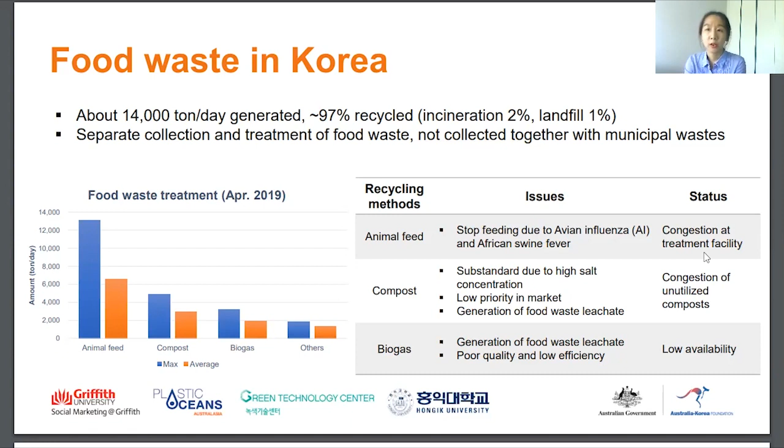In the case of biogas, this is actually a practical approach for food waste, but the final product from gasification showed poor quality and low efficiency at the moment. And currently, only a small portion of food waste is gasified.

We have several ongoing issues related to food waste. First, we need an alternative recycling method for food waste. Secondly, there is a policy requirement for renewable energy. Renewable portfolio standard, RPS, requires electric providers to provide a specified percentage of electricity with eligible renewable resources. To meet RPS requirements, wood pellets have been applied for co-firing with coal in a thermal power plant.

As you can see in this figure, the target renewable supply obligation is 9% for this year, but I was told we are doing about 6% at the moment. And using wood pellets is costly because over 90% of wood pellets have been imported.

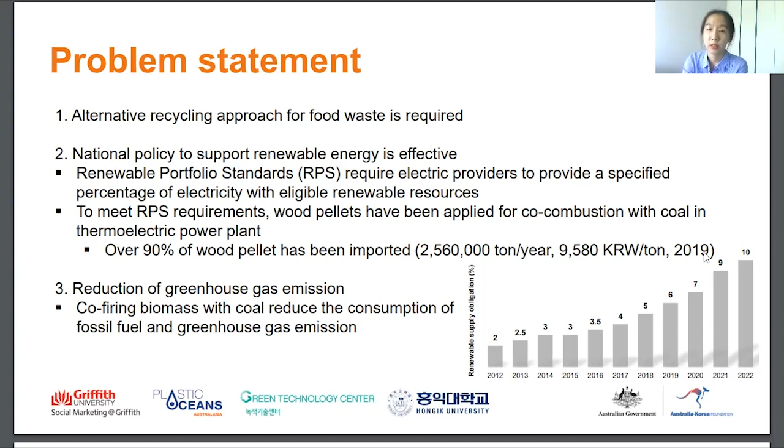The last issue we need to consider is the reduction of greenhouse gas emissions. Running a thermal power plant is one of the main sources of greenhouse gas emissions. Co-firing biomass with coal reduces the consumption of fossil fuel and greenhouse gas emissions. Therefore, we aim to propose an alternative treatment approach for food waste to ensure future sustainability.

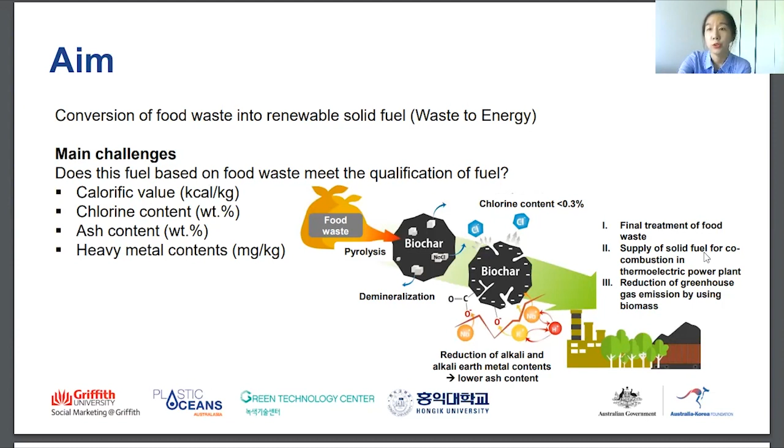In our research, food waste is converted into renewable solid fuel. Here, the main challenges are to satisfy the qualification of fuel, including calorific value, chlorine, ash, and heavy metal content. What differs here is that we produce high quality food waste biochar. I am going to go into details on this process on the next slide.

And this is a base workflow. Food wastes are collected in the food waste treatment facility, and these are dried and shredded. Dried food waste is put into the pyrolyzer. Pyrolysis temperature is set to 300, 400 or 500, and the retention time is 10 to 30 minutes.

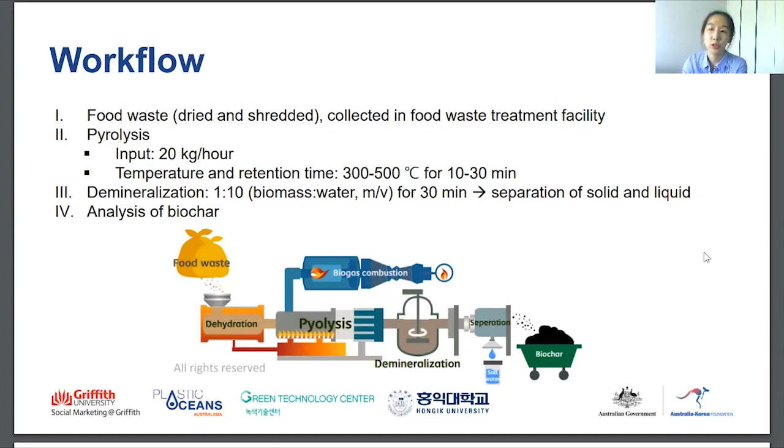After pyrolysis, food waste biochar is produced and desalinated to lower chlorine content. Food waste biochar is dried to remove the remaining moisture, and the final product biochar is analyzed to make sure of its quality. I'm going to show you what we have achieved.

First, the chlorine content in food waste was efficiently lowered by demineralization. And this is a critical issue in solid fuel because when biomass containing chlorine is combusted, it generates dioxin and dioxin-like substances, which are very hazardous.

The chlorine content of raw food waste is 1 to 2%, and after pyrolysis, concentration increased to 2 to 4% because volatile matters in raw food waste are volatilized and overall mass is reduced. So relative chlorine concentration increased. The high concentration is lowered to 0.5% after demineralization.

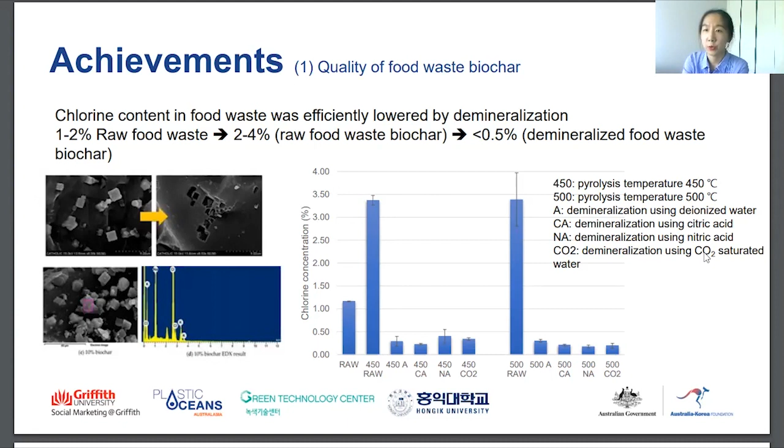And I'm going to skip the details of this figure and the experimental process, but the point here is that various pyrolysis and experimental processes have been tested to find out the most efficient reduction method for chlorine from food waste biochar.

And calorific value is another critical factor in fuel because this implies the amount of energy produced based on fuel. And low ash content is desirable because high ash content in biochar leads to slagging and fouling in the plant facility. Several experimental settings were tested to achieve high calorific value and low ash content of food waste biochar.

As you can see here, pyrolysis temperature of 500 degrees Celsius and demineralization using CA, where CA means citric acid, is the most efficient method to obtain food waste biochar with high performance. And this calorific value of 5,000 kilocalories per kilogram is similar to that of coal.

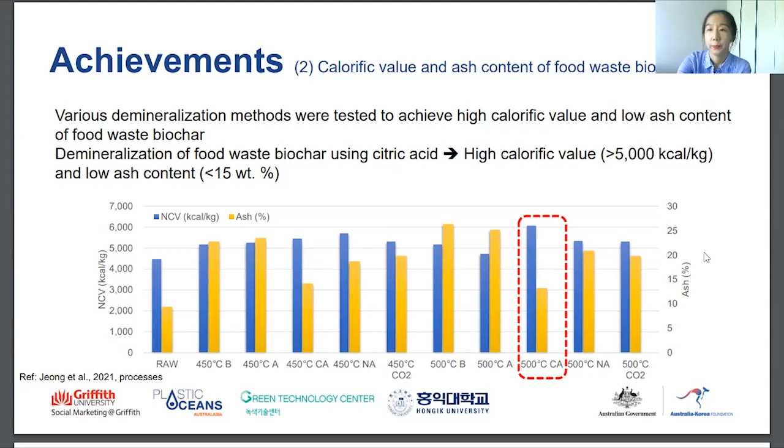We also consider other biomass, sludge from wastewater treatment plants. Sludges are usually employed in co-firing with coal, but high metal concentration and low calorific value have been problematic. So we thought a mixture of food waste and sludge may increase calorific value and lower heavy metal concentration. And we can see it here.

From the graph on the left side, with an increasing food waste ratio on the x-axis, the calorific value of mixed biochar increased. And in the graph on the right side, you can see here the heavy metal concentration decreased with increasing food waste ratio.

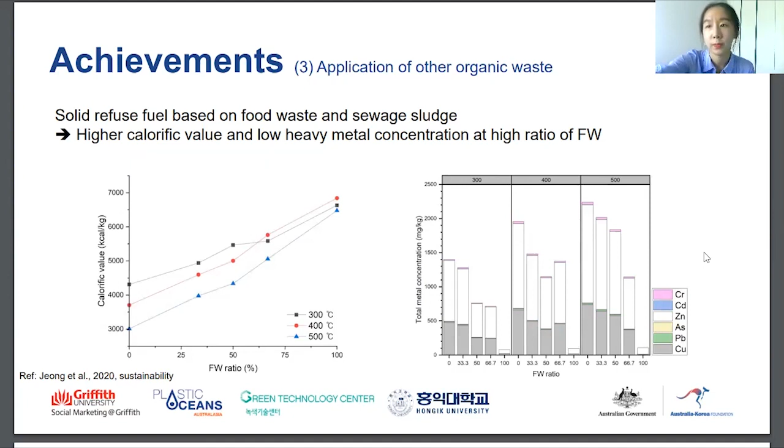So far, I have introduced the research we have worked on, but this is not going to work if we work alone. Converting waste into renewable energy requires the cooperation of regional government and electric providers. We have networks with electric providers and regional organizations.

So far, we have focused on laboratory and pilot scale research, but talking about actual application of food waste biochar in the plant facility.

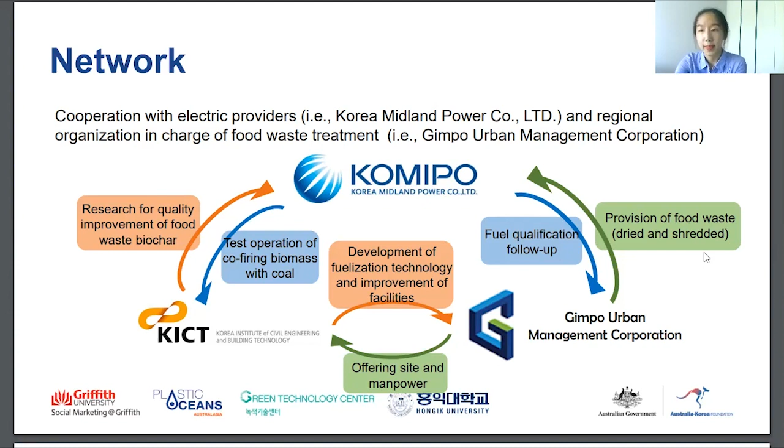This is my last slide. The very beginning idea of this research is that food waste is an untapped energy resource with a large volume and high carbon content. We confirmed that food waste biochar meets the qualification criteria of fuel for coal-fired thermoelectric power plants in many aspects. In addition, we also checked that the combination of food waste and sludge is promising.

But we still have a long way to go. The energy efficiency and combustibility of food waste biochar in the plant needs to be tested. And we don't know the optimized ratio of biomass for co-firing. And of course, the life cycle assessment of food waste biochar is required to ensure that this is sustainable and environmentally friendly. Lastly, we have regulatory issues.

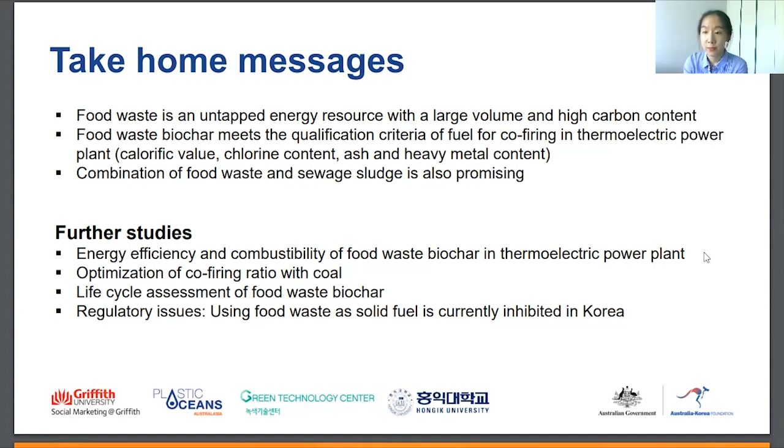Currently, using food waste as solid fuel is inhibited in Korea. So we are talking with people in the regulatory and industrial sectors to sort out the better approach for food waste. That's it for my presentation, and I will be happy to answer your questions.

Thanks, Yoonah. Thanks so much for that. And I actually understand that you like dining. A little bird told me that you like dining out and going out to restaurants with your colleagues, and that if there's any food left over, instead of leaving it there, you actually make sure you take the food for research later, of course, knowing that it's better to have no waste at all. But that's wonderful to know that you actually do practice what you preach.

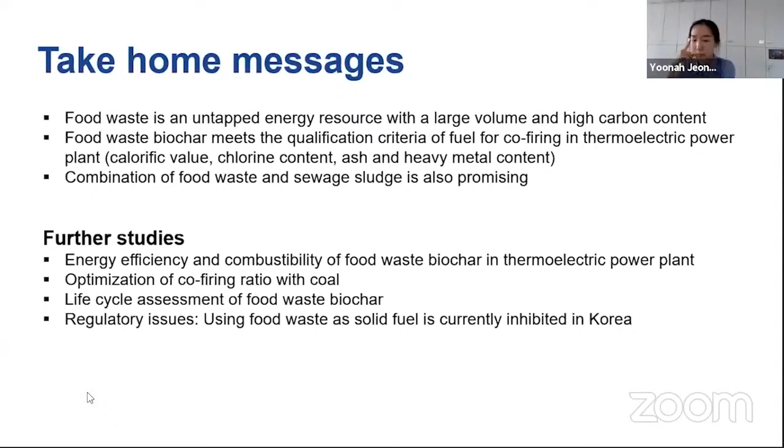Before we move on to the next speaker, I did actually have one question that I wanted to ask you, because I find this really fascinating with your studies and what you're working on. I wanted to ask you what you think the advantages are of using food waste biochar in a thermoelectric power plant compared to using wood pellets. I just wondered if you could expand a little bit on that. I'm quite interested in that comparison.

Actually, wood pellet is a good material for co-firing, and that's why we use it at the moment. But the problem is we need large quantities, and it costs a lot. And the application of wood pellets generates a high amount of ash, which causes operational issues in plant facilities. And we found that the quality of food waste biochar is similar to wood pellets in terms of calorific value and chlorine, ash, and heavy metal content in many aspects.

But food waste biochar is an economic choice because a huge amount of food waste is generated every day, and we can use existing plant facilities to produce food waste biochar. So it's a cheaper choice. And we think using food waste as a renewable fuel solves both environmental and social problems in the waste and energy sector.

But actually, everyone needs to keep in mind that this research is based on lab and pilot scale at the moment. This is not actual plant scale research, so we are working with electricity providers and regional government to deal with this issue from a broader perspective. Fantastic. Well, I hope it comes to fruition from the pilot stage, because it's obviously fantastic that over 90% of the household food waste is being used, which is terrific.

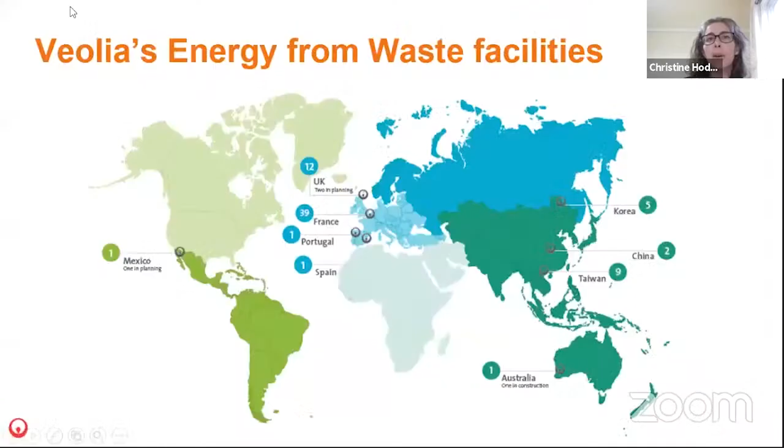So from a global perspective, I guess it's interesting to understand where we fit into the overall scheme of things. When we look at overall recovery rates, we talk about recycling and energy recovery as two of the key elements that contribute to creating recovery across the board. And where Australia sits in this global picture is we're relatively good at recycling, so we have a reasonable recycling rate, but due to our heavy reliance on landfills, we haven't been able to bridge that gap in terms of our overall recovery rates.

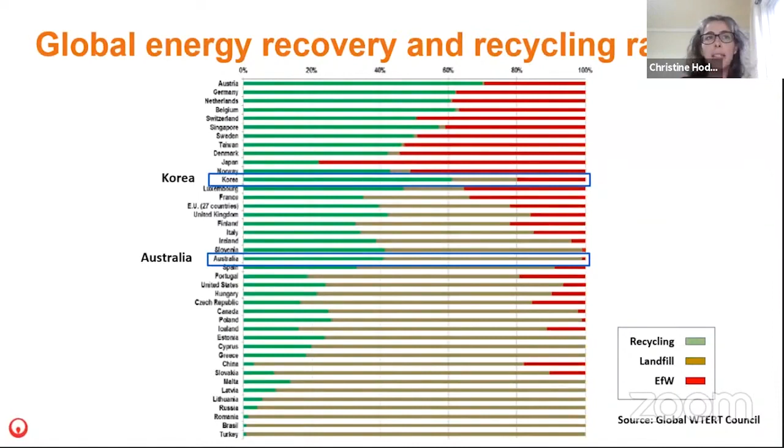So next slide, please. So if we then look at the Australian landscape from a policy point of view, it is very complex. We have 3 layers of government that all have different roles to play in terms of how we manage our waste and our resources. So at a national level, we do have policies, we've got action plans, we have export bans that are gradually being implemented over the next few years, and we've also got net zero ambitions. So that's a really good platform for us to start from.

I guess the challenge is that the waste that we manage is regulated at a state level, and so the state governments have a very big role to play in terms of determining what type of levers there are to encourage different technologies to be implemented.

So it's pleasing that all states and territories do have waste strategies and action plans to try and help drive the direction that we're heading. And in terms of all mainland states, there's a specific policy on energy from waste, which does assist. I guess the challenges that we have is when there are discrepancies between those state approaches, then it can make it difficult to introduce technologies across the board.

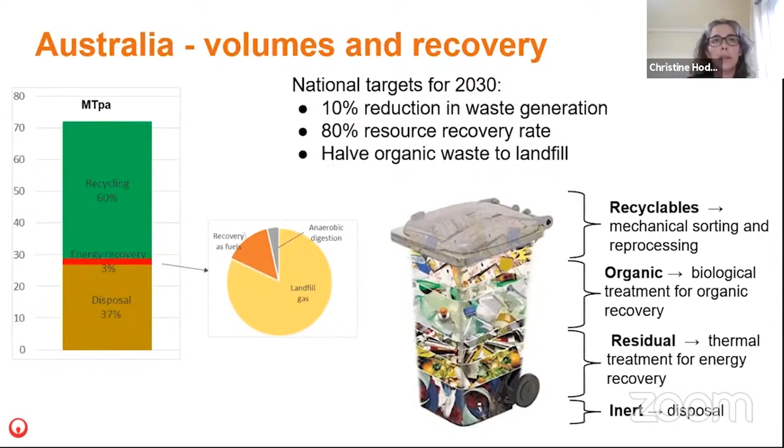So just talking about 2 of the most common types of energy recovery technologies. So there's thermal and biological. So from a thermal treatment process, technologies such as combustion, gasification and pyrolysis, which Yoonah spoke about a little bit earlier. So all of those are thermal processes, and they use differing levels of oxygen in the environment that they're occurring in to produce steam or gas for energy production.

Apologies if you can hear my children running down the hallway in the background.

In terms of these different technologies, combustion is a suitable process for mixed waste streams, and so that includes prepared fuel. Anything that has been processed to actually create a fuel can be used from a combustion point of view, whereas the other 2 require slightly cleaner or more homogeneous waste streams. So the example that Yoonah spoke about in terms of food waste, much more suitable for either gasification or pyrolysis.

Now, in terms of biological treatment, these processes use the natural fermentation process of organic waste to actually break down the organic material and produce a biogas, again, for energy production. And as I mentioned before, landfill gas extraction is one of the main forms of biological treatment that we have now across Australia.

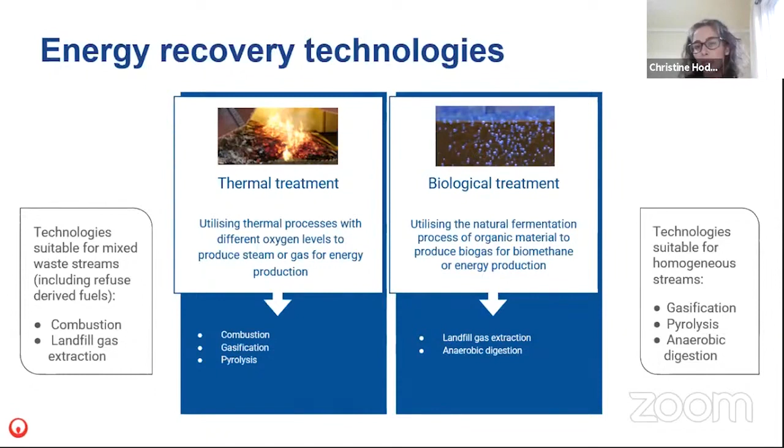Anaerobic digestion is another key technology which is suitable for a clean organic stream. The benefit of anaerobic digestion is it can actually produce a fertilizer from the digestate as well. If we can go to the next slide, please.

So talking through in a little bit more detail the thermal treatment process, essentially it's quite similar to a conventional coal or gas combustion process. The waste is combusted at high temperatures to generate heat. The heat produces steam, and that is used in steam turbines to either generate electricity or for heat supply.

And really where the technology and a lot of the effort and complexity comes into these processes is in the flue gas treatment. This is the treatment that's done to the gas to clean it up before it gets released to the atmosphere. This includes ammonia injection into the combustion phase to control the nitrogen oxide levels, and then further on through the process, the addition of lime to neutralise any acidity in the gases and activated carbon that helps to absorb the particulates.

The gases then pass through a baghouse filter, which captures those particulates prior to the release of the cleaned gas to the atmosphere. This process uses the embedded energy within the waste as an alternative to fossil fuels. Essentially 3 tonnes of waste can replace 1 tonne of coal in producing electricity. That creates a lower carbon energy solution, and it also reduces the need for landfills. If we can go to the next slide, please.

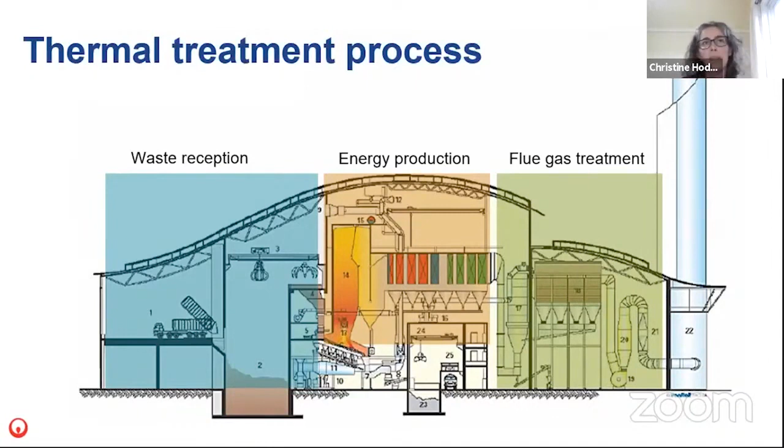In addition to energy production, the other outputs through this process are bottom ash, which is approximately 20% of the inputs, and that consists of the non-combustible materials, things like stone, grit, glass, and rocks. They can be further processed to produce an aggregate, which can replace virgin material in the construction industry. Part of that reprocessing of the bottom ash also creates the opportunity to extract metals, both ferrous and non-ferrous, about 2%, which can be extracted from the bottom ash and used for recycling.

What's left at the end of that is the residuals from the flue gas treatment, and this is where the contaminants are captured, and a suitable end use for that is disposal on site. When you look at that all together, this can achieve greater than 95% diversion from landfill. If we can go to the next slide, please.

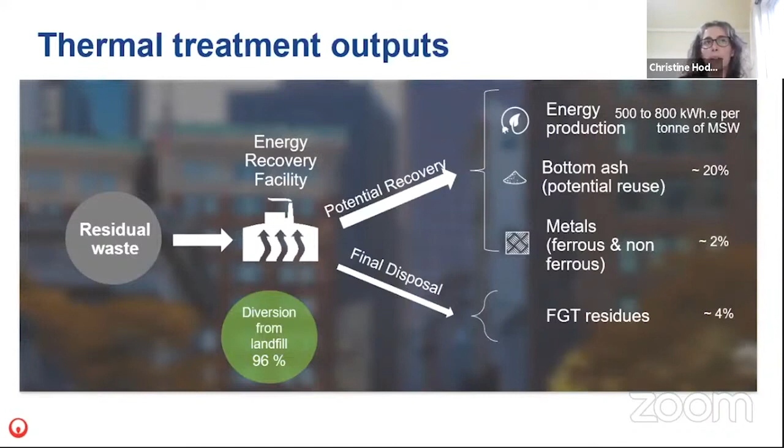I'd just like to give you an example of the journey as I see it in terms of waste management. Woodlawn Eco Precinct is a facility that Veolia has been operating for almost 20 years now, so it tells a bit of a story about how we have progressed over time. That facility started out as a bioreactor landfill, using a degraded mine site, a mine void, and as part of rehabilitating that, using it as a landfill and extracting the gas from the site to produce renewable energy.

And rather than just finishing there and saying all we're doing is landfilling waste, there was a long-term vision in terms of what else could we do, now having a presence on the site. As a result, we've utilised the waste heat from the electricity generation to develop an aquaculture farm. We grow barramundi and sell that into the Canberra market, which is the largest local market for this site. On site, we've also been able to develop other renewable energy sources.

There's a commercial wind farm operated by a third party on site that generates renewable energy back to the grid, and also a solar farm that supplies the majority of the power demand for the site. The most recent addition to this facility is a mechanical biological treatment plant. This plant processes mixed waste and produces an organic material that can be used in the rehabilitation of tailings dams.

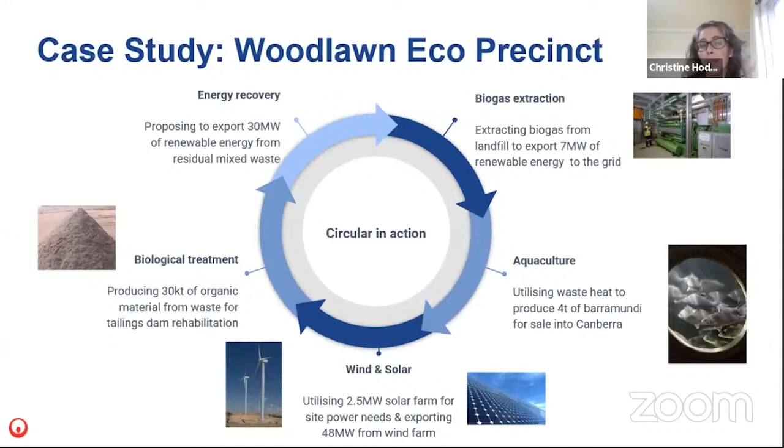And the next step that we see for this site is the potential development of an energy recovery facility that could result in an additional 30 megawatts of renewable energy generation from the site. If we could go to the next slide, please.

I guess just looking at having an energy recovery facility or activity on site creates other opportunities, and one of those other opportunities is to capture carbon dioxide from the process. What this has the potential to do is to further reduce greenhouse gas emissions and possibly even create a carbon negative facility. So when we're talking about thermal treatment, the flue gas typically has about 5 to 15% of carbon dioxide in it, compared with landfill gas, which is typically about 50%. So there's significant opportunity if we can capture that carbon rather than release it,

and then also find a use for it. So in terms of reuse opportunities, this really is a new and emerging technology, and it's continuing to be developed. What you can see here is some of the potential uses for that captured carbon, in the form of carbonation, also building products and potential for fuel. So these are really emerging technologies, and over time I see it as a real opportunity for us to really improve those greenhouse gas capture outcomes.

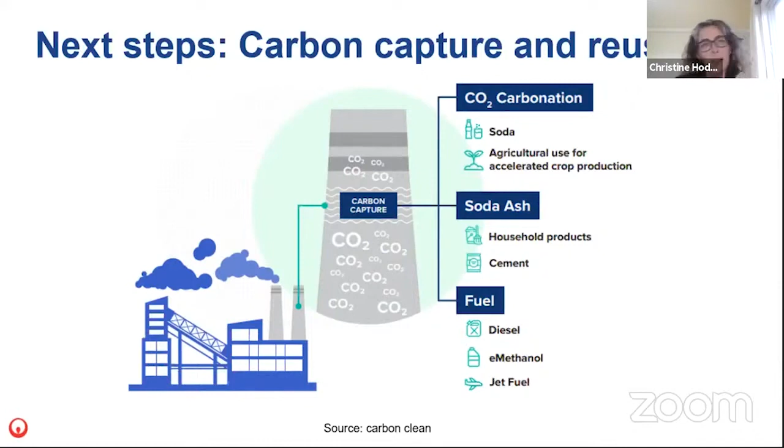Can we have the next slide, please.

So finally, I'd just like to finish on a Korean case study. Now, full disclosure here, I'm part of the Australia and New Zealand part of the Veolia business, so I'm by no means an expert on what we do over in Korea, but my Korean colleagues kindly gave me an example of something that we're doing over there, which I think is really exciting and innovative in that energy recovery space.

So what we're doing is we're using pyrolysis to process artificial marble waste, so the offcuts and dust that come from, say, a kitchen bench top, and recycling that into methyl methacrylate, or MMA, and aluminium oxide for use back into the building industry. So MMA can be used in acrylic lighting and automotive lamps, and aluminium oxide can be combined with silica to use for raw materials in ceramics.

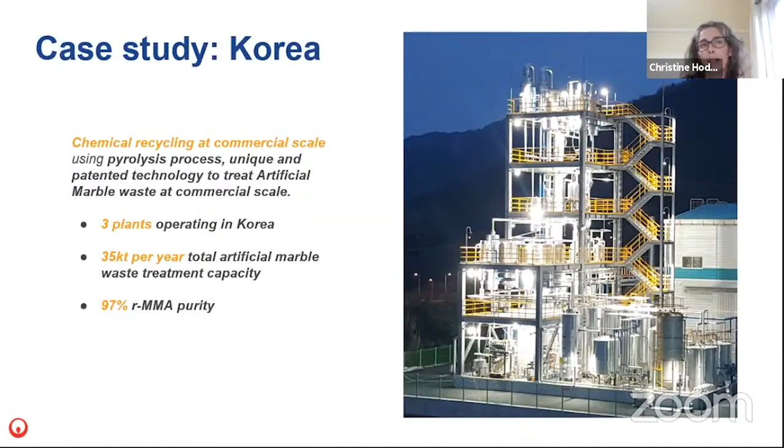So that's just another example of the things that Veolia is trying to do globally to look at different opportunities. And I think it's really encouraging to see that there's different ways that energy recovery can go in terms of technologies. But the overall outcome and the significant impact that I see it making is being able to not only improve on recycling or recovery rates overall, but also reducing greenhouse gas emissions. Thank you.

Oh, that was fantastic, Christine. And you just threw that last little bit there in as a teaser at the very end. Wow, what's going on in Korea? Don't ask me difficult questions on that one. No, I was going to say that's pretty phenomenal, amazing. So I had a couple of questions I just wanted to ask you.

Yeah, thanks for that, Ricky. So as you pointed out, the economics is really a key part of it. The two other key areas that I would say, one being the regulatory framework. So not just from an economics point of view, but really having an environment that supports the opportunities for value add recovery that can come out of this. So looking at opportunities about the byproducts that come out, what can we do to reuse, to capture more carbon? So actually being supportive, and I suppose it's government and industry working together to try and come up with those initiatives, is another opportunity.

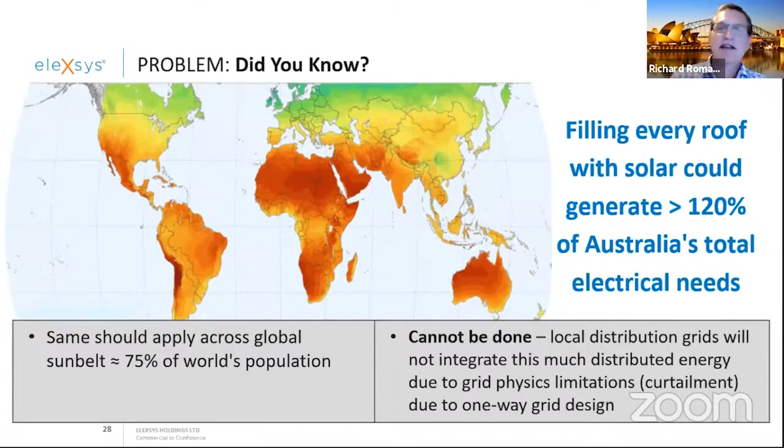And this is the key. In California, well, pardon me, let's say Florida, they're way behind us in Australia. This problem of backwards energy, where the grid can't handle all your energy going backwards, only happens when about 15% of the rooftops in your neighborhood have solar. The first 15% of customers get this fantastic, I get all my energy, I get all my feed-in tariff. Once you hit 15%, you get this problem called curtailment, which I'll explain more as we go forward. And this is happening now in Australia, Vietnam, Hawaii, all over the world.

What that means, I'll just use a residential example. In Australia, when you install rooftop solar, you think you're going to get a three-year payback, but you're really getting a 5 or 7 year payback because the solar inverter and the grid is actually reducing the amount of energy you can send into the grid. Next slide, please.

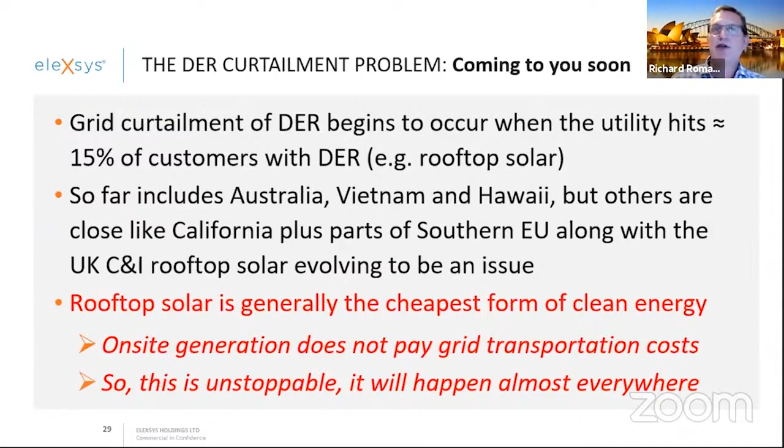But our technology fixes it. We turn the one-way grid, we change the fundamental physics of the grid and turn it into a two-way grid with our power electronics and software. So that really increases the return on investment. I'll show you in a second. We can create 10 times bigger projects, and we can do that without huge cost to the grid. Next slide, please.

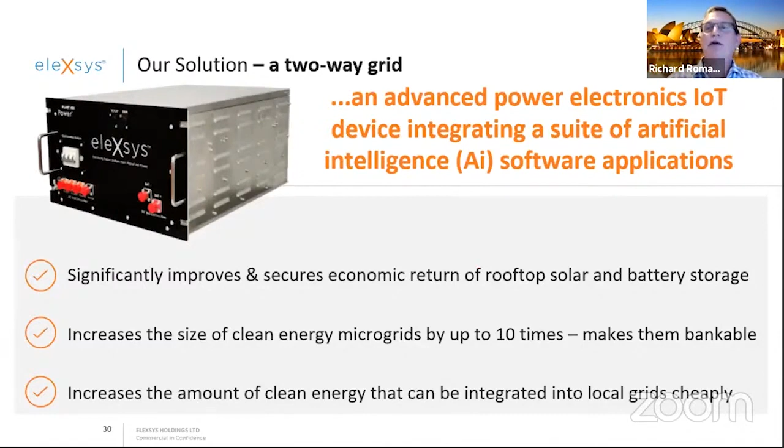This is our IKEA cornerstone project.

And I'm sitting here, I'm usually trying to turn on a stopwatch so I don't ever go past 10 minutes, which is my time, but I forgot to do that. So I hope I'm not going to go too long.

So this is our IKEA flagship site in Adelaide, where we're demonstrating all our concepts. And we're able to fill the roof with solar. The whole project is 10 times bigger than what the current smart inverter and the grid constraints will allow. So if you were to do this today without EleXsys, you'd only put about 500 kilowatts of solar on the roof. With our technology, with the solar and battery, you're putting 2 megawatts. You're turning this into a mini power plant.

And 70% of the energy goes backwards. This thing called uncurtailed is crucial. That means when I send that energy backwards, I'm never going to get any constraint. When I send 1 unit of energy backwards, I get paid for 1 unit of energy. In the grid, when you send energy backwards, you get curtailed. I'll show you that more later.

The key, though, is that this becomes bankable. So it's not owned by IKEA, it's owned by the pension fund. Without bankability, then it doesn't release the ability for this trillions of dollars of pent-up money around the world to invest into this new asset class called distributed energy.

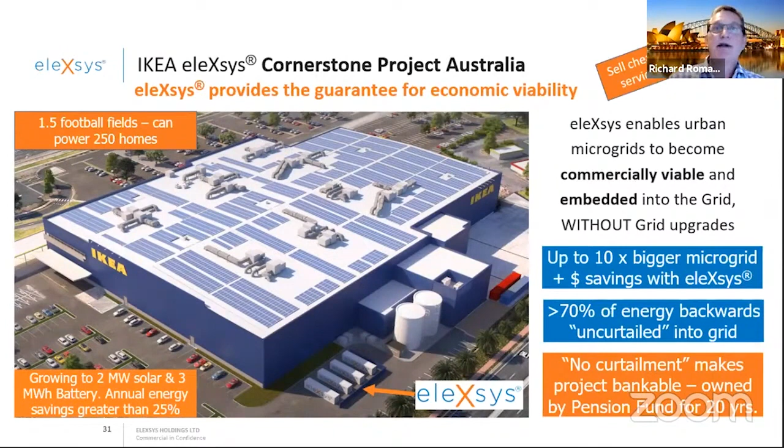Next slide, please. So the next phase, stage 2 of IKEA, is we're actually putting in a solar car park, EV fast charging, converting all their delivery vehicles to EV, and it will become net zero on-site. From on-site generation, they will be net zero. So it's a huge part of going global in terms of decarbonization.

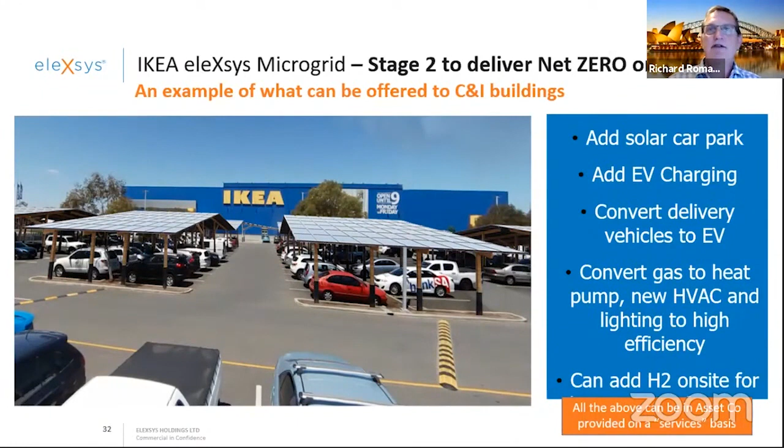On top of that, they'll save 25 to 35% of their energy costs, as opposed to buying energy from a solar farm, where you don't really save any costs. So this is huge. They're going to scream about this when we get that far and deliver and prove it. They'll scream about this from the rooftops. And this is effectively where we can turn some industrial and commercial sites into net zero from on-site generation. Next slide, please.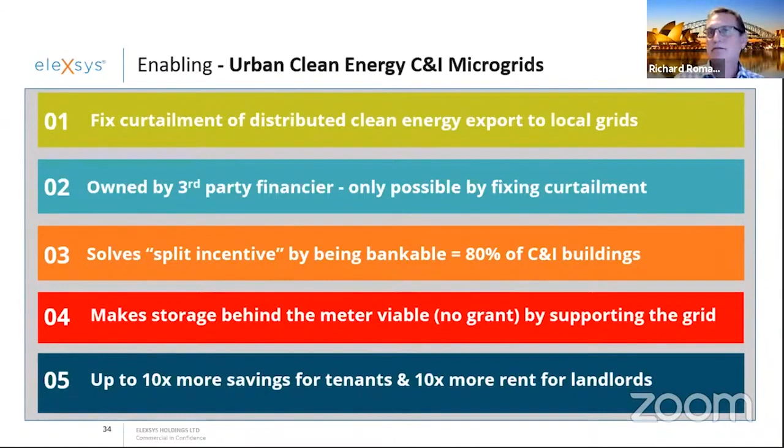And this is not just Australia, this is global. We are going global. EleXsys is a global company. In Australia, we go to market with Planet Ark Power, our master licensee, but EleXsys is the global brand name. Here is an example of Vietnam. In Vietnam, in 1 year, they went from 764 megawatts of rooftop solar to almost 9 gigawatts.

Anyway, so you can see the difference. Huge, massive increase. But guess what? Everything got curtailed, so they're losing 25% of the energy, and so we're going to put EleXsys into those sites and fix that problem, so that energy doesn't get wasted. It doesn't just go up and poof into the air.

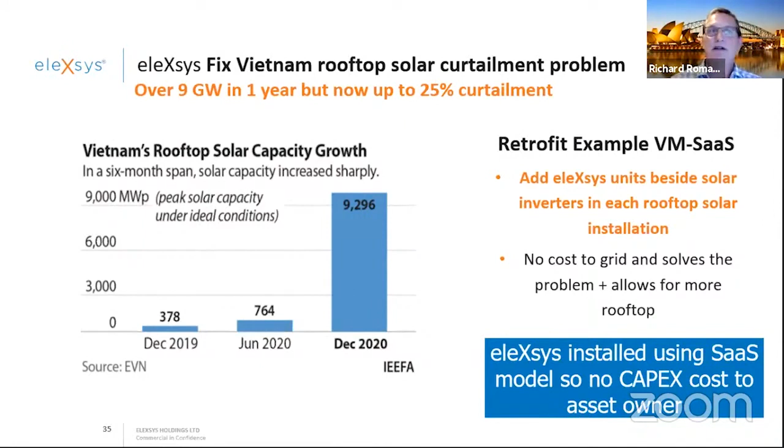Next slide, please. And our model to scale globally, because there's no time to waste. There's no time to waste. We need to do this fast. I don't want to do this in the USA and whatever. I'm actually licensing everybody around the world to do this. We're looking to become the Intel inside of the global, local, renewable supply chain.

So we're looking to license Veolia, Vinci, Engie, all the global big companies and the small local companies to use our technology, build 10 times bigger microgrids, fill every rooftop with solar. They make money, we make money, and we save the planet at the same time, is what we're doing as our vision. Next slide, please.

So we're ready to go global, and that's what we're doing. And we're there changing the world because there's no time to waste to decarbonize and save the planet. That's me. I'm finished. Thank you.